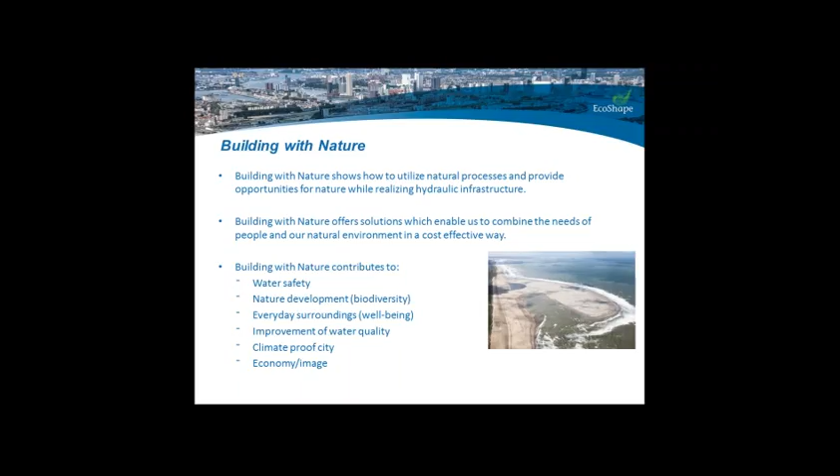I also work one day with the community, with the municipality of Rotterdam, and here I work a lot with urban designers. They always asked me - or not anymore, but in the start they asked - what is the difference between building with nature and city greening? Because we know how to green the city, but what do you exactly mean by this building with nature?

So I thought, yeah, that's a good question, I have to explain this. So I put it in one sheet.

City greening, what we mean with this - and I don't want to point fingers or disregard anything - is more about gardening or greening the city. You bring in plants to have a greener, more vegetated setting. In this way you can increase livability, people start to feel better, feel good, so it's also increasing health. But it's also very beneficial for recreation, meaning actively enjoying city nature, and it gives you some kind of natural surrounding.

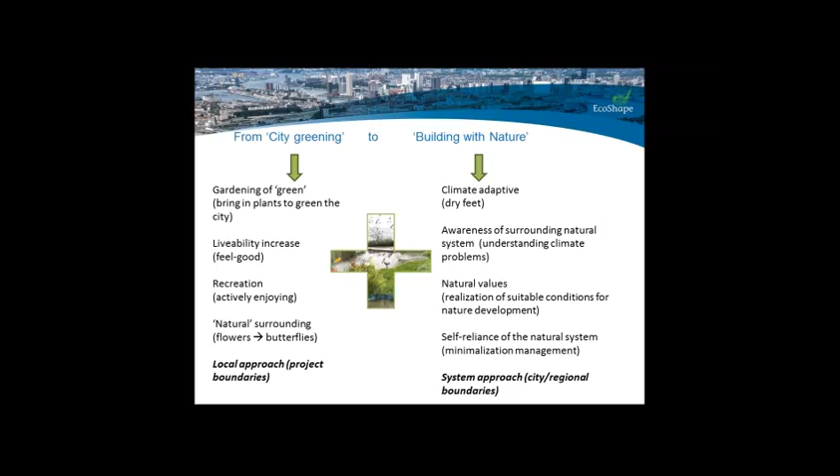By the way, we call it building with nature, but you can also call it green infrastructure or nature-based solutions. They're all more or less the same with some slight differences. I don't want to say this is building with nature instead of city greening - it's an excellent thing to mix these things. I don't want to push something away.

So, back to Rotterdam. I have to introduce Rotterdam a little - I think most people know it. Rotterdam is on the west side of the Netherlands, near the sea. It is actually caught between rivers, and the Nieuwe Maas River is flowing through it. At the bottom right, you can see it as a nice skyline, very close to the river.

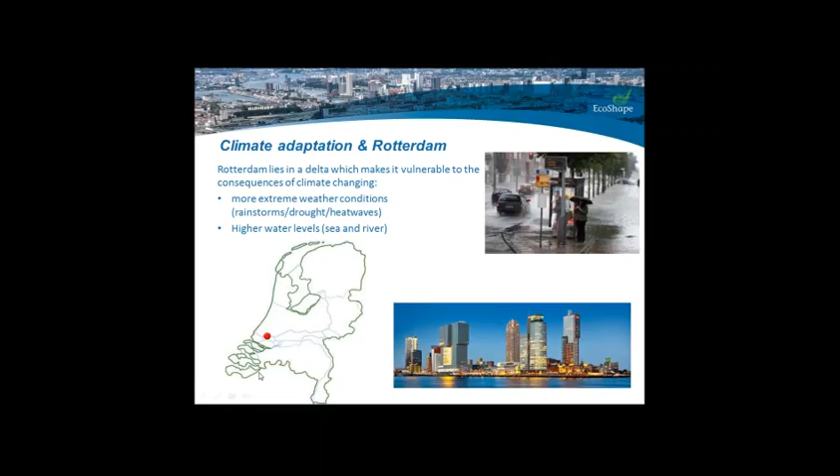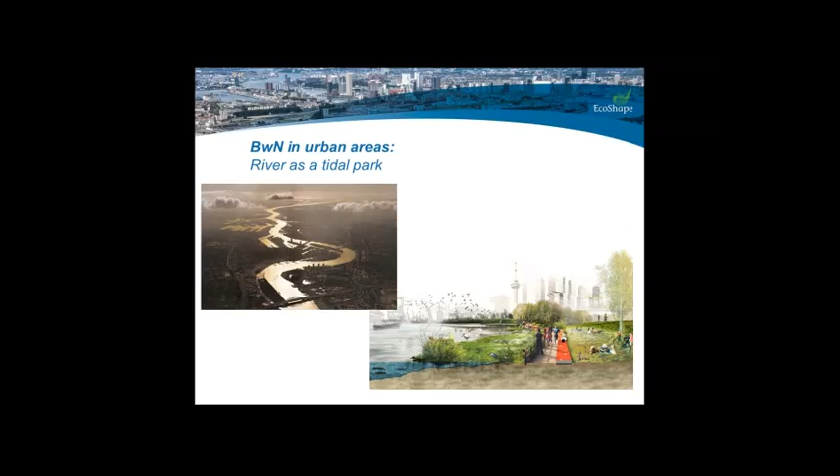In the picture downwards on the right, you see an illustration of how the river as a tidal park could look like. So now I'm mentioning the river as a tidal park.

Why is this program set up? Well, the current situation in the Rotterdam area - and now I'm talking from the sea almost past Rotterdam - there you have many stony and steep river banks or shores, more than 70%. This gives a very hard look to the river, and the city of Rotterdam wants to have it otherwise, because this is not a very attractive site.

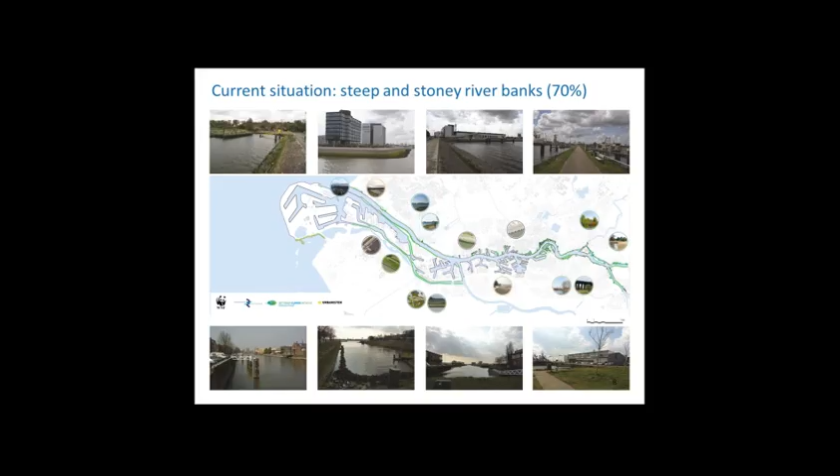Also, there's a lot of ecological poverty - a lot of habitats you would expect in a tidal zone like this, because within the city of Rotterdam we have more than 1.5 meters of tidal difference. Normally in an estuary you would have large tidal mud flats and other tidal marshes, salty or brackish, and these are missing in this system.

You can imagine this is not only missing for the site itself, but a lot of fish and birds are not attracted anymore either. Especially for fish, the rivers seem to be isolated from the hinterland, and of course many fish need to go to the hinterland to reproduce. So you can see ecologically something needs to be done.

But there's also a water safety issue - of course, we are in the Netherlands, so we really need to address water safety. As you might know, in the Netherlands we are very fond of dikes, we dike everything. The green parts here in the Rotterdam districts are fine, because we look at 2050, and at that time we want the dikes ready for the expected situation. The red parts are not ready.

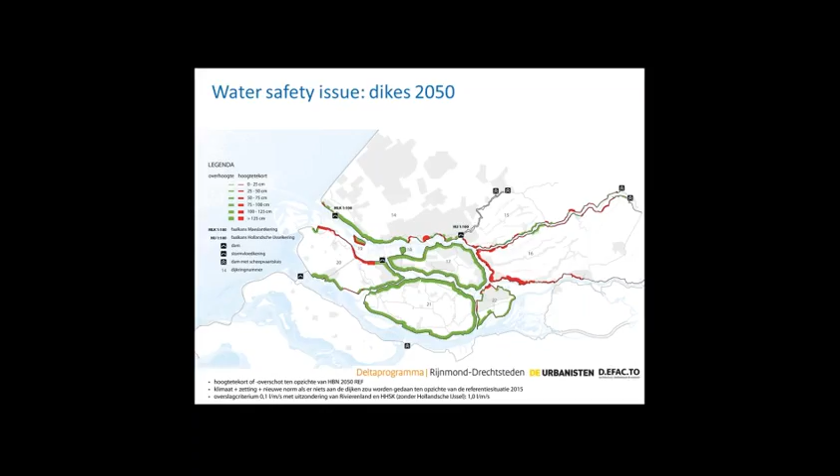So back to the River as a Tidal Park. With the poverties and problems I just described, they thought: we have to bring together the city and nature again, with all the benefits that might address these problems. So they formed a big consortium, and I want to go through it because it's important, also because we were talking about the incentive to set up a nature-based solution or a building with nature concept. Different organizations got together.

The first one is the Dutch State Water Service, Rijkswaterstaat. Their interest in this program is that they have an obligation in the Water Framework Directive for constructing natural shores, and within this program they might find suitable shores to turn into natural ones, getting them in compliance with the Water Framework Directive.

The Worldwide Fund for Nature, the Dutch part WNF, together with ARK, a foundation, is also in this consortium. It of course has a biodiversity goal: they want to increase the tidal nature area in the estuarium of South Holland.

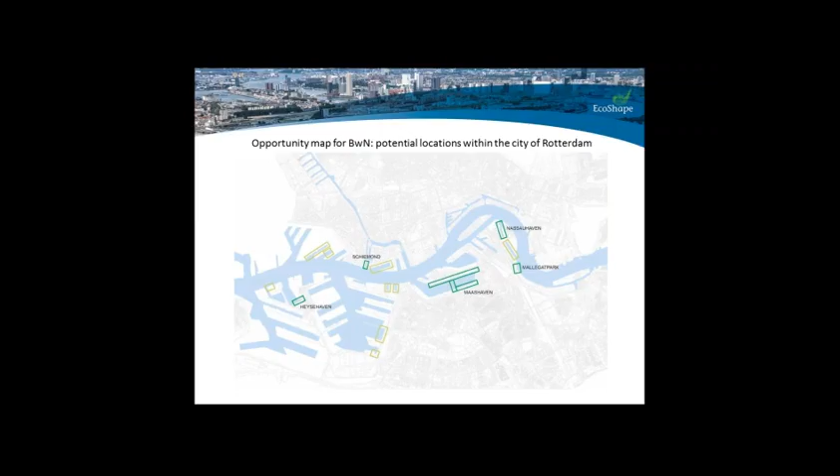So let's dive into Rotterdam - how will this look? This is a small opportunity map, only for within the city of Rotterdam. Here you see all the urban ports, as they call them. Most are not commercially used anymore by the Port of Rotterdam company, so they are starting to reconsider the use of these ports or harbors, and using them to show tidal nature is one option. But as I said, all the incentives from all the partners are being expressed in these new projects.

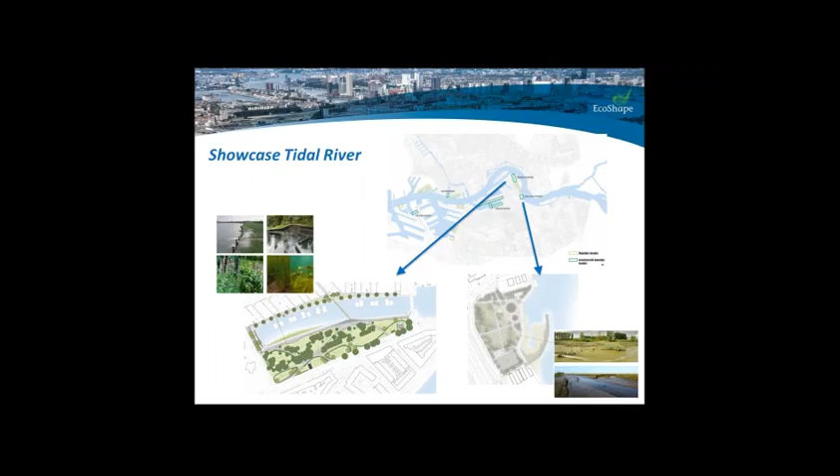So I have one sheet more. For our EFRO subsidized project, we do it with EcoShape. We have four goals on the side, by designing these structures.

Because we want to learn from the implementation process of building with nature in Rotterdam. So we really want to find out how our urban operation process is going, and where we can put in building with nature knowledge, and in which form we should present it to these urban designers. The second goal is that we want to put building with nature knowledge into these designs, because we are not leading these designs. Those are the urban designers from Rotterdam themselves.

Also, we want to make a quick scan, which we are doing already, of the building with nature possibilities in this region, according to the natural system - in which part of the river can you put which concept? And finally, this has also already started: because all these different projects within this program are very erratic in time, and also because of the funding possibilities, you never know when or where a project will start.

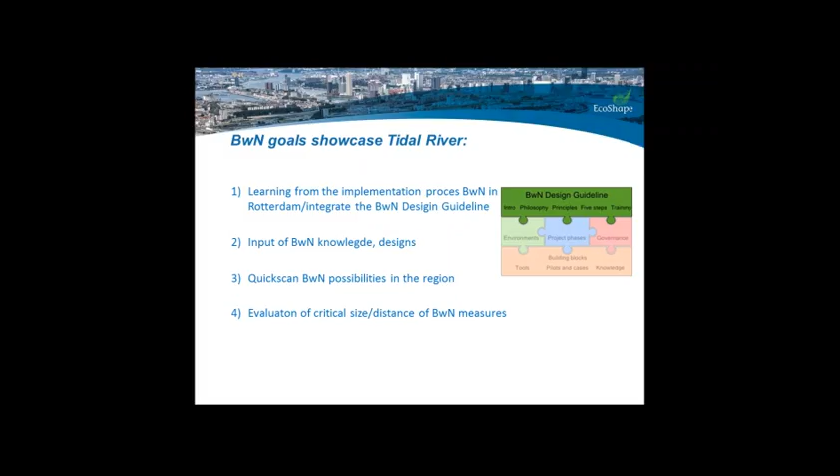So we are asking ourselves, are these little dots of nature contributing to the regional nature value? What is the critical size and distance between these building with nature measures in order to really upgrade the regional natural values? And this was my presentation. I hope you have many questions, I'm willing to answer them, and I give now the floor back to Chantal.

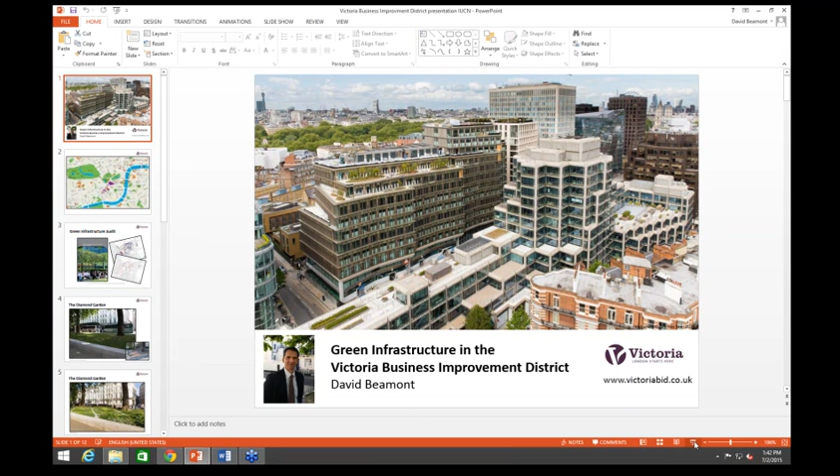Hello everybody, my name is David Beamont and I'm the Operations Manager at the Victoria Business Improvement District here in Victoria in London. Over the next several slides I'm going to talk about how we've approached installing green infrastructure here and the method we'll use to get underway and understand more about our local area, and I'm going to touch on some of the qualitative and quantitative research we've been involved in.

This is overlooking Victoria Street, which runs from the bottom left of the screen to the top right, and it's one of the main thoroughfares in the area, built in the 1850s. Today the area is undergoing significant investment, seeing a lot of the rather grey and older office buildings built in the 1960s and 70s being replaced or refurbished. There's about £4 billion worth of investment being directed into the area, including the upgrade of transport infrastructure such as the underground station at Victoria. Over the next few years, about 3 million square feet of new residential, commercial and office space will be created, so a significant amount.

The Victoria Business Improvement District was set up in 2010 to bring together businesses to help shape and influence the regeneration of the area. BIDs actually first started in North America in the 1960s and 1970s as a sort of funding mechanism involving public and private stakeholders to regenerate spaces. Here, legislation was passed in 2003 enabling BIDs, and now there are about 210 in the UK and the Republic of Ireland.

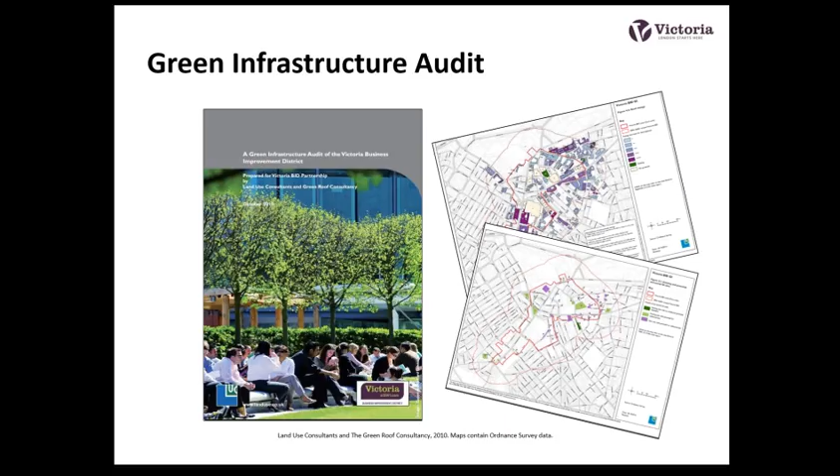The next few slides focus on some of the projects we've installed since that GI audit was finished. This slide shows one of the first sites we worked on, and this was listed in the Green Infrastructure Audit.

It's adjacent to Buckingham Palace and the Queen's Gallery. We approached the palace with the idea of improving the biodiversity of this site and also installing a rain garden. The rain garden idea didn't prove viable, but replanting the site did.

We worked with a landscaper called Nigel Dunnett at the landscape agency, who designed the space in consultation with the head gardener at the palace.

On the bottom right, you can see work underway that involves removing topsoil and laying down some channels for some Portland stone that we included in the design, and lots of tree protection as well, protecting the 2 London planes that are there.

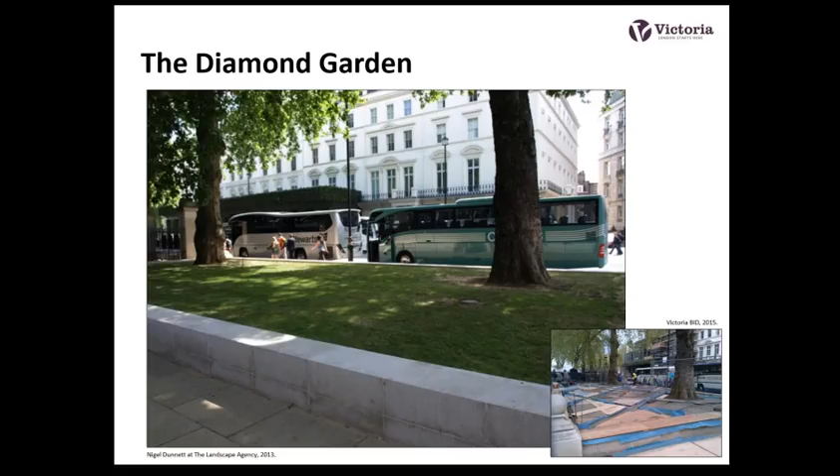This next slide shows the result. This was installed by a company called Landform, and basically Nigel's approach here is to have extended flowering over time, so there's much more forage for pollinators as possible, and also looks great for as long as it can. It's also what he terms a future-proof garden that can cope with future weather patterns, and one that requires low levels of maintenance.

In terms of maintenance, as well as paying for the install, we paid for 1 year of maintenance by Landform, and after that the garden was handed back to the palace. That enables us to carry the project through a 1 year life cycle and address any teething issues before we hand it back to the site owner.

In terms of footfall, we know that in the 2013-14 financial year, over about 150,000 people visited the Queen's Gallery, which is just to the right of where this photograph was taken from. And that's not including people walking up and down the street here and going to the palace, or just going to and from the different parks in the area.

So moving on from the ground to walls, these blank walls were on the side of the Rubens at the Palace Hotel, which is one of several hotels in our footprint.

Walls weren't included in the final GI report. The focus was primarily on terrestrial and roof spaces, but they were highlighted nonetheless by the survey team.

We undertook a structural appraisal for the wall and a feasibility study about what type of living wall could be installed here. We went to speak with the hotel, and they liked the idea so much that they worked with a living wall specialist called Gary Grant and employed a company called Treebox to install the scheme.

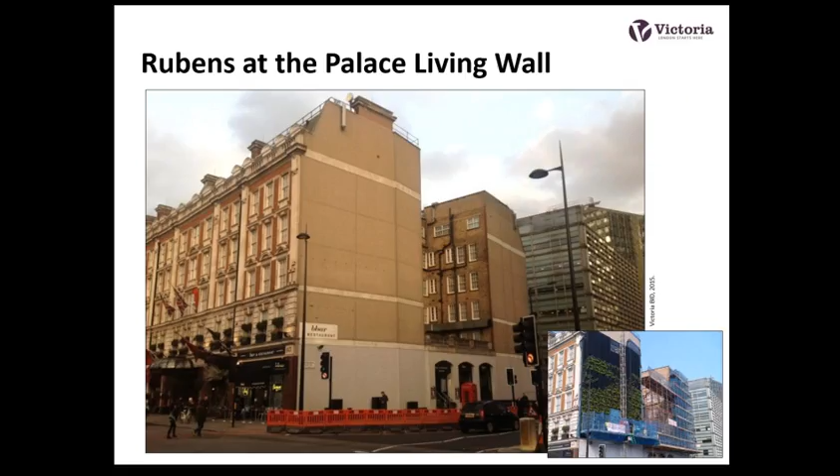This is the result. It currently spans about 450 square meters, and was planted up at the start with over 12,000 plants. It also has a 10,000 litre rainwater harvesting tank built into the design, where rainwater is captured and then used to top up the main supply.

Because of that, it received a grant from the Greater London Authority's Drain London Fund, which supports projects that make better use of rainwater and help tackle surface water flooding in London. This is a problem in Victoria due to large areas of hard surfaces, although it's improving.

Cost-wise, you're looking at a six-figure project here, so about £450 to £500 per square metre, a significant investment by the hotel's owners.

Monitoring and maintenance on a project like this is really important. This is looked after by Treebox. We also recorded a time-lapse of the wall being installed, and that's on the hotel's website if you're interested in taking a look.

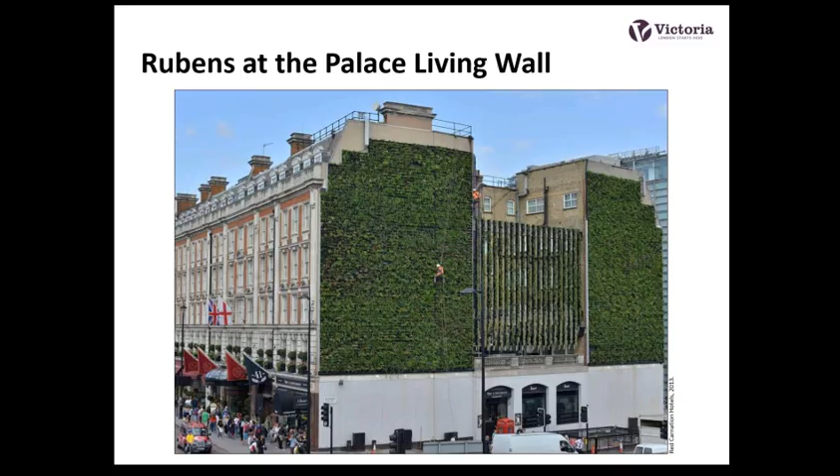We also had plans for a living roof on the top of the portico, but that was actually abandoned because it became too complex and too costly.

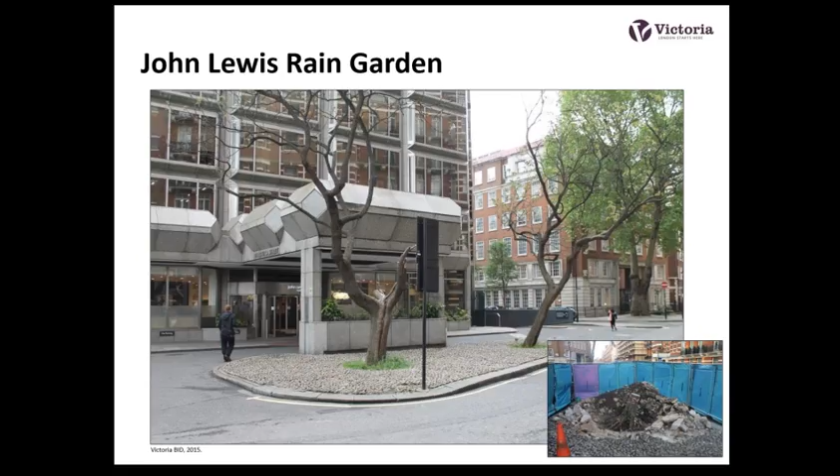Now that rainwater is simply diverted into the garden, and it is used to water the plants in the garden through. So a very simple approach here in its essence.

The installers, again, we worked with Landform, and they also cut gaps in the curbs, so when it rains heavily, water can flow into the garden and percolate through the soil rather than cause surface water flooding.

This was part funded by Natural England, which is the government's advisor for the natural environment in England, and Drain London as well, because it involves putting more green space into the urban environment, and makes better use of water.

These really are the types of projects we need to have more of in London, especially as the anticipated impacts of climate change are wetter winters and hotter, drier summers. They help make London, and Victoria especially, a lot more resilient.

What I also want to say here is that the green infrastructure audit and these schemes we've been involved in have incentivized others to do things. For example, we're now speaking with John Lewis about creating another garden nearby.

After the Rubens Hotel living wall was installed, a nearby hotel saw that and went ahead and did something similar, slightly smaller but still just as good to see. Land Securities, one of the largest developers in the area, has installed a very biodiverse green roof on one of their new buildings.

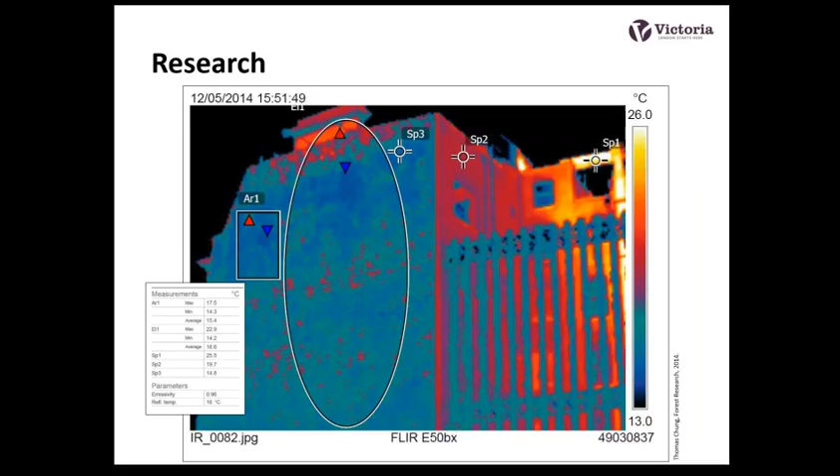These next two slides show some of the qualitative results from research carried out in 2012 and 2014 by two universities we worked with, University of York and London Metropolitan University, funded by the Department for Environment, Food and Rural Affairs, also known as DEFRA. The project aims to investigate what impacts GI improvements have had or will have on different groups of people, so workers, residents and so on.

So what I can do is use the research here and combine it with the green infrastructure audit data to create a really good picture of where we should be installing more schemes in the future and the benefits they can provide. The next slide, my final slide, is also very useful.